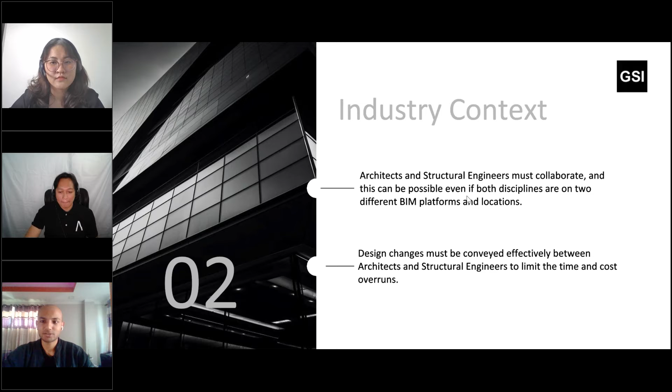Yeah, I totally agree. So moving on to the next slide, this is what we just talked about. The closed BIM approach restricts the ability of stakeholders to seamlessly exchange information, right? And it's quite nice if we can use Open BIM to break that siloed workflow or fragmented communication.

So let's start. In this webinar, we have these contents that we will be covering. First, we already finished the background info, so we will start with the general workflow. Next slide.

Before you continue, I'll just add that we're showing you only Archicad and Allplan, but that doesn't mean you should focus on just these two softwares. There are a lot of softwares you can use. We're just showing that you can collaborate with any software as long as it can provide the information, so you have a better workflow for your project. Just to be clear on the software you're going to use, we can show you a smooth process using Graphisoft and Allplan.

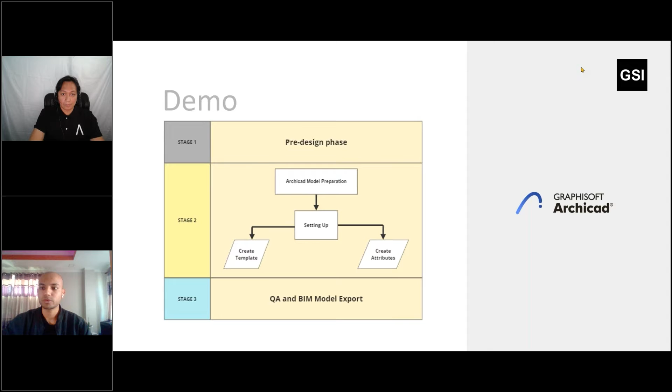I hope my screen is visible now. So this is the Archicad interface we have. This is the sample model here.

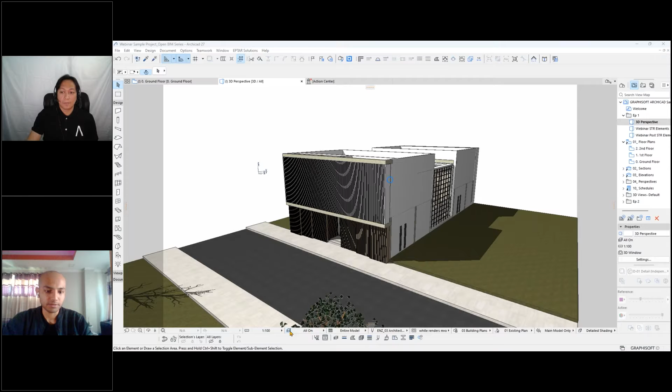Stage 1 is the pre-design phase, where the architects design the building, which might look something like this. For this project, we have this sample, and we will sort out this model so we can provide it to the structural team. Once the collaboration starts, we can set up the layer combinations, separating the layers as per the need and requirements.

Even before stage 1, the design team is supposed to have the templates created, the attributes maintained, and everything set up before starting the project. In this sample, we already have those done.

So on stage 2, basically this happens - the setting of templates, the creation of attributes, and all those things. But on stage 3, we move on to QA and BIM model export, which I'd like to show you here quickly.

On the QA side, we use a lot of layer combinations that we require to check for any discrepancies before exporting them to other design teams.

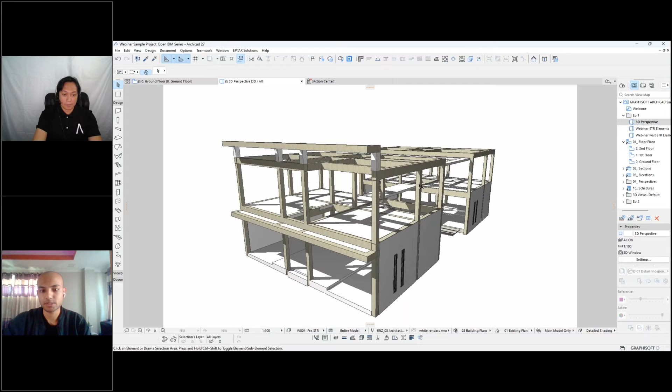First, I can just quickly switch to the structural model, which is an imagined concept made by the team for the structural layout.

We can also check the whole model according to the layers, if the layers are kept in the right model - I mean in the right layer, basically.

Also, highlighting the structural elements is necessary so that all those structural elements are on the proper layer, and once the other team receives the BIM model, they also have those same layers.

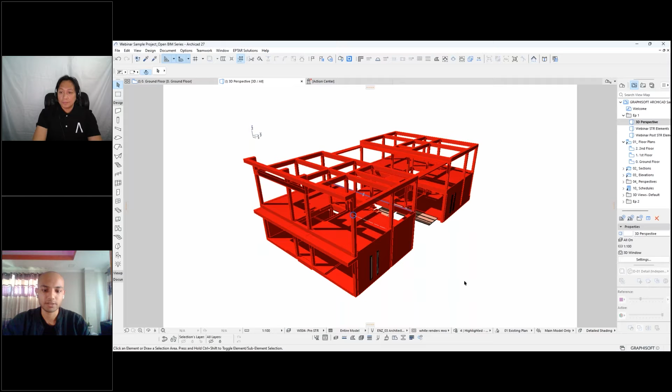Currently, I'm switching to no overrides, and this is the pre-design phase where we have not exported the model, so the layer combinations are set up in a way that displays the pre-design stage currently.

So this is where I export the model for the structural team to visualize the whole design concept, and they will get to adjust the structural elements, analyze the design accordingly, put in the load combinations, and rebar placements as well.

So quickly showing you how to export. Currently, I can just do the save as function here in Archicad. If I do that, it will give me a dialog box.

I hope you can see the dialog box. Is it visible? Yeah, it's visible. So currently it's saying to export the visible elements on all stories, and there's an option called entire project.

So depending on the phase or data exchange process, you can choose between these. If it's the first time you're sharing the model with the other design team, you might want to do the entire project. If it's in between the design phase, you can also do just the visible elements as per the requirements.

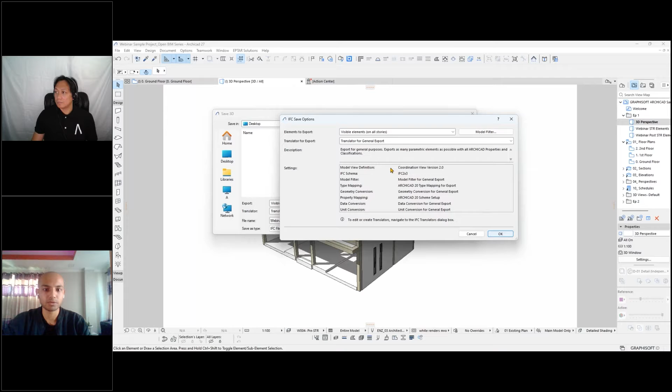Currently for this webinar, we have already set those up, but Archicad gives you the possibility to alter these settings. So for this, we will be going on with the general export. Once that's done, we just hit save so that the elements get saved.

So the model has been exported. I will send this to the structural team. For now, we have Jayson here with us, who will be taking that file in and try to seamlessly integrate that in another software, which will showcase our Open BIM concept for this webinar.

So that's about it from my side for now. I'll be back soon. Jayson, feel free to take the floor. Okay, thank you, Sudhir.

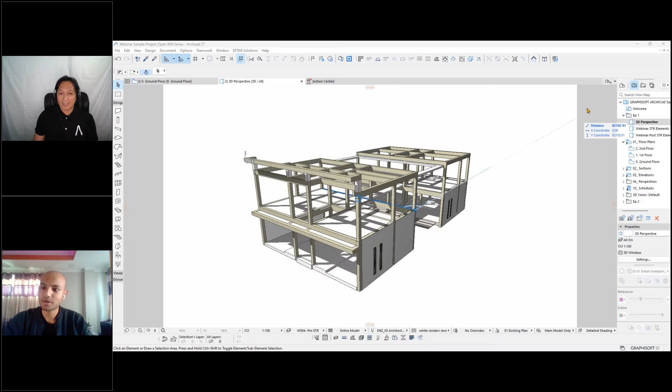I guess from your export, you also do some exporting of, let's say, attributes, right? Sudhir, I think you're muted. Yes, about that part, I would like to mention that as well. Thank you for reminding me.

No problem. So basically, with this model, we also want to share an attribute that has been custom made. In a project, the design team might want to have those properties custom made and sent out to another design team to fill it up or cross check. So for this one, we have a custom attribute created for this slab right here.

Yeah, so back to the Graphisoft interface. The custom attribute will be located here for the slab, on the classification and properties panel. We have a lot of properties here, but we will be mainly focusing on the floorings, where we have this custom attribute called webinar attribute 001 and 002. Number one is going to be a true or false statement; it can be a custom one. Number 2 will be a description that anybody can add, like a sample description here.

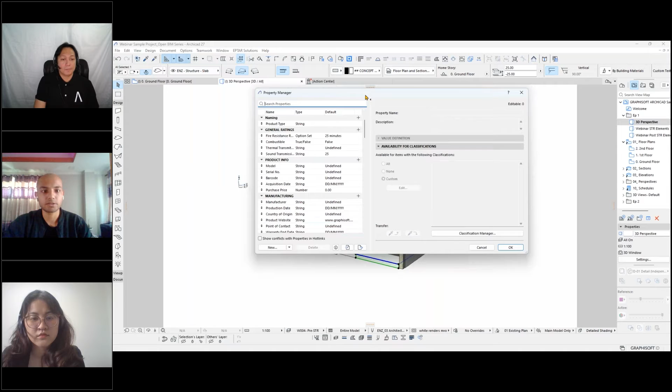This is possible here in Archicad by using the property manager palette. These are the settings where we can customize, create new properties or groupings, and assign them to the classification. We have classified this slab as a slab element, and then we have added the property to the slab as webinar 1 and webinar 2. Just demonstrating as a sample, I hit the name, and once that's done, it will be added to the naming group.

It will be added here as a string, but we have the option to choose from numbers, integers, or geometrical variables such as lengths, areas, volumes, or angle. You can also have tag lists and option sets created for it, true or false. What's even more cool is you can have expression-based properties defined here in the expression editor panel. For this, we added it on the floorings, as you can see over here.

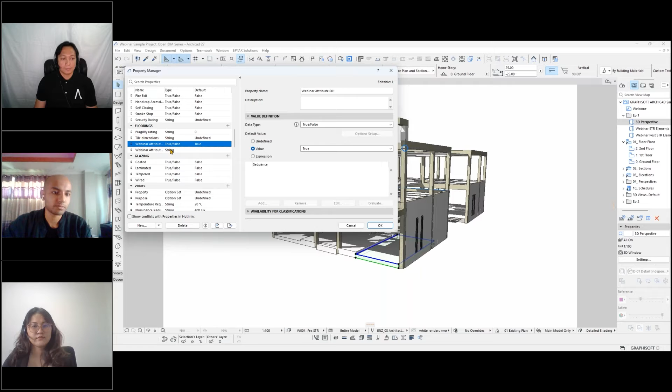This panel is where we can import and export properties as well. If you have a template already existing in your office or company, you can import the properties that are already there, or export what you created for future use. So for this webinar, we have it on the slab, and that's what I missed earlier. So Jayson, you can go ahead now.

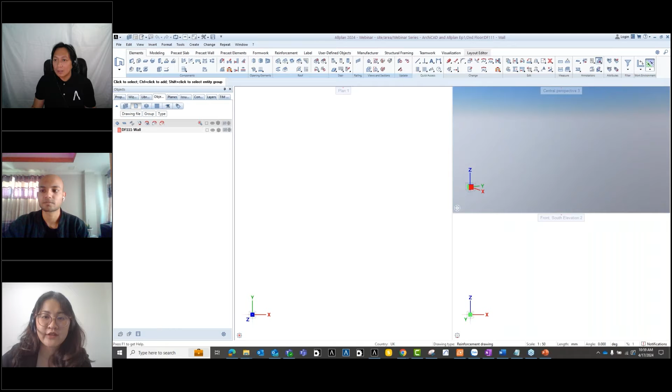Okay, thank you so much, Sudhir. Maybe I can take over. Thank you, Nu. I'm not sure which screen I'm showing. Can you let me know which screen I'm sharing now? We are seeing the software interface. Okay, great. Maybe I can just share first the monitor one. Let me shift my things here. Can you see my screen now? We can see the presentation slide, right? Yes, thank you.

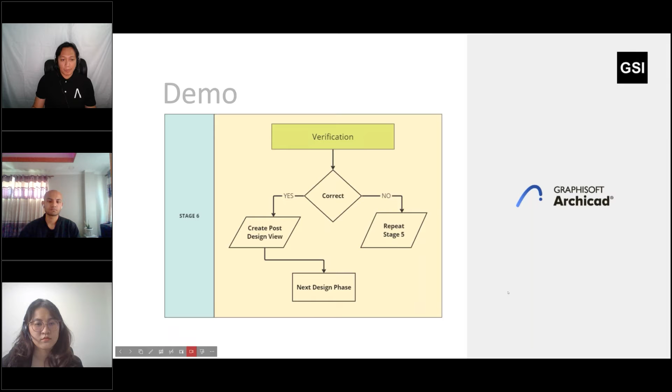Okay, so next slide. So this will be the next slide later on. Okay, so I will be showing back now my main screen, which is monitor 2. Now, can you see my software now? Open. Yes, okay, we can.

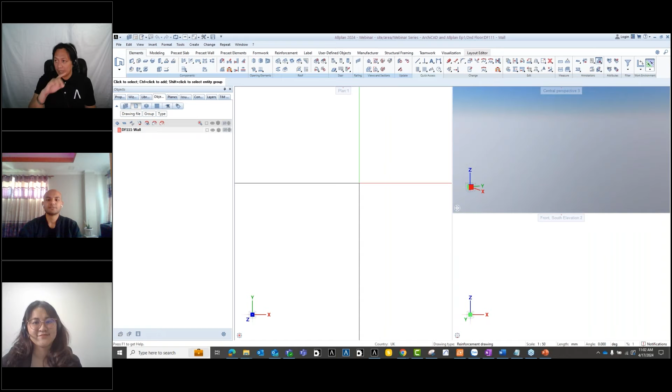So basically, this is the interface of Allplan. For those who don't know about Allplan or haven't seen Allplan, there are different industries here. That's why it's called an AEC software. There are different disciplines inside Allplan. You have architecture, engineering, bridge construction, and also precast. We also have road construction, and you can customize as well.

So basically, we'll just continue. I have the file now from Sudhir, which is this one. This is the one he exported. I will just import this using drag and drop, or I can use the import IFC data. Drag and drop is much easier. So I'll just drag and drop it. Then it will ask where I'm going to save it, so I'll just choose one.

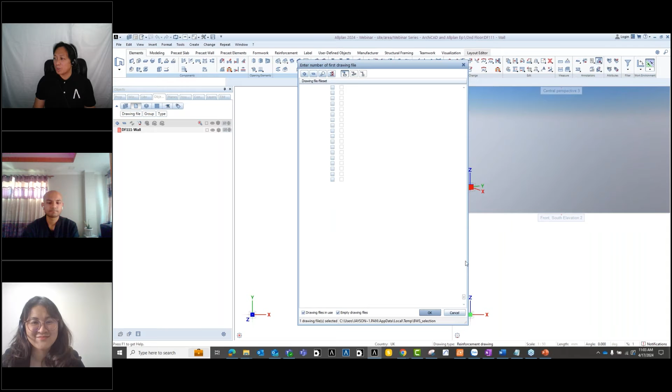I can go to open all drawing files. So we have actually 9,999 files where you can save it, so you can just choose from there. I'll just choose number 1 and then wait for a while to load it. Yeah. So now I have my model. This is the model that was shown earlier, right?

And since I will be the one in charge of the structural, there are some elements here that need to be changed. For example, for all the beams and columns, we have to change the sizes. This one is 250. If I measure it, it has to be at least 300, so it will be tied up with the beam.

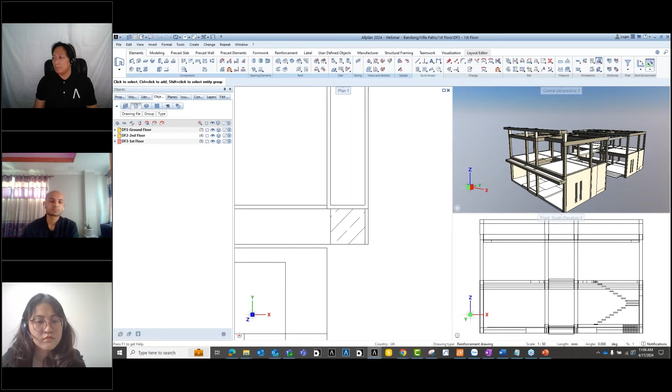But before that, since I'm working with Allplan, I can show you that we have this kind of building structure wherein we can organize our files, right? So what I did was, using the same model, I already have this separated. I have the ground floor, the first floor, and the second floor. So I'm going to work on these 3 levels.

And if I'm going to open these, I'll just say open. Yeah, just open this, and then select one, click on, and I can show you that I will have the same model. I just pre-modeled the beam, so maybe I can just remove this beam. Okay, so I have this model now, similar to what I had initially.

Moving forward, before I change the elements, I just want to highlight the slab. I guess this is the slab that Sudhir created. Just to show you, the attribute was captured. Let me check. Yep. There is an attribute wherein it's true or false in Archicad, but in my case it's just check or uncheck. It depends on the calculation or the integer that was placed before it was exported. So whatever you placed in Archicad as the attribute will also be captured in Allplan.

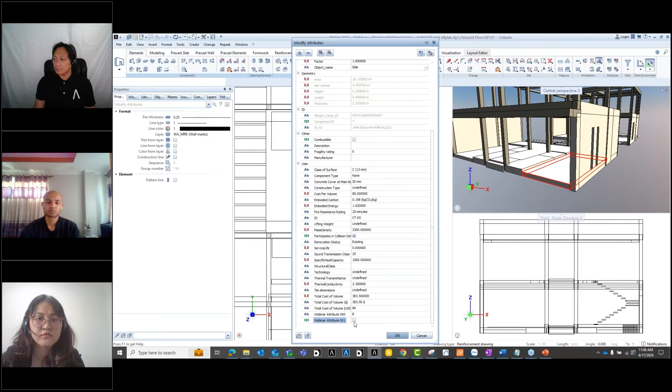Okay. So moving forward, as I mentioned before, I'm going to change the sizes of the columns. I will just separate the columns. I can do it this way, or I can open this whole thing and use my object palette here, which makes it easier. I can remove the visibility of all, and then open the eye of the column so that I can only see the columns.

What I can see from here is that the column size is 250 by 250. So I need to change all of them to a 300 size column. What I can use is this apply architecture component to this column, and I will change this to 300 by 300, and then say okay. And then I will just click all of these and say apply.

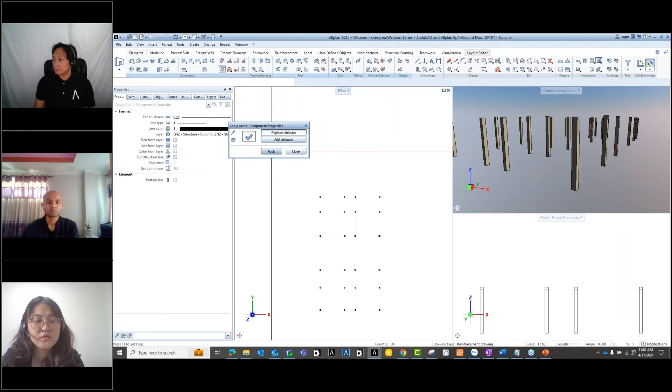So basically the rest will be shown, but you can just say go back to this object and just remove this and highlight this again. So if I'm going to check on the column now, all the columns should be 300 from this part. So that's how fast it is to change all in one.

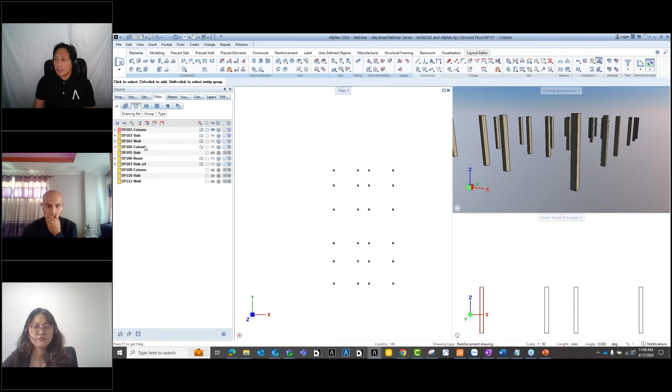Now, if I'm going to open my beam, so basically I have a beam on the second floor, which is this one. So basically my beams, as I think from the base design, should be 300 width. For now, it is only 250. Okay. So what I'm going to do is change, of course, the beams as what I have done with the column. So I will just use the same thing and then select the beam, and then I will just change the thickness of the beam to make it 300.

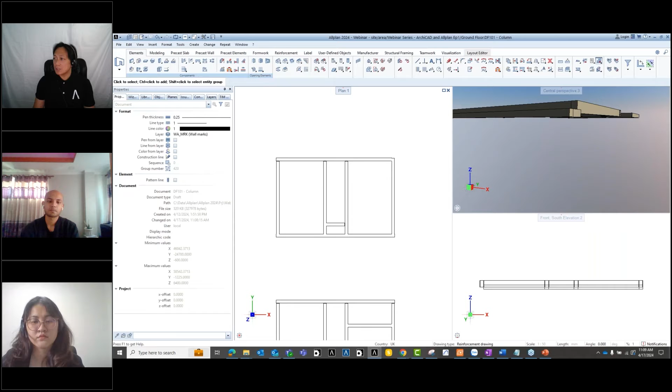So I can select which beam I'm going to change. Let's say like this one, or I can highlight as a window selection, and then I will say apply. And of course, let's see if it changed now. So now the width of the beam also changed in one time. So you don't have to click one by one and then change. So it's easier to do this way. Okay. So this is for the changes that I have made for the column and beam.

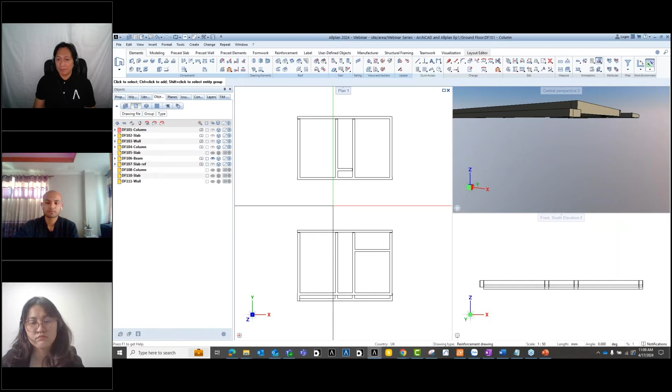So basically, moving forward with the other structure, like for the slab on the ground floor. So basically, I have this, make it visible. So I have this slab. So how fast is it to create a reinforcement, particular to different areas? So for the thickness here, you can see they're different. So maybe I can just focus, let's say, on one element here.

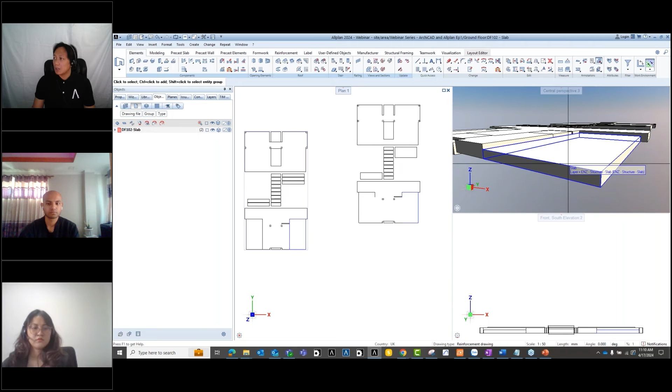What I can do is just create a view. So if I'm going to create a view, just say view, generate view, and then I can select, or I can select all, so it doesn't matter. So I will just select all. It's a plan view. So I'm just making a view so that when I put the reinforcement, it will be reflecting on this slab. So basically, if I place now reinforcement, where is it? Reinforcement, yeah. And then I will just use this enter area reinforcement.

And then I'm just going to do a window, and then say the concrete cover will be 25. As you can see, I have reinforcement here already. I can change the spacing. Let's say make it exaggerated a little bit to 200. And then I have some hooks on the end part. So you can modify the hooks of the bars. So basically, I just say okay. So if I'm going to show this in the isometric view, there should be some reinforcement shown already. So this one I will show it later.

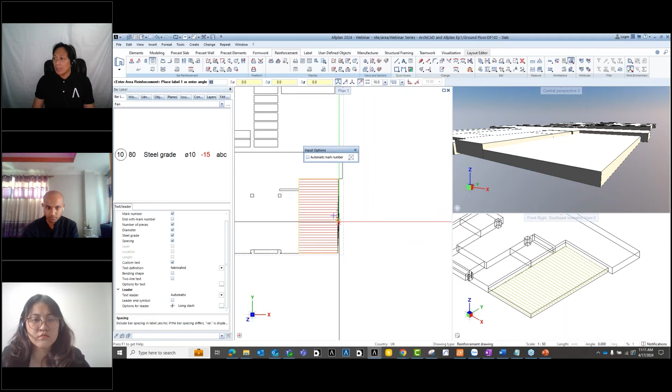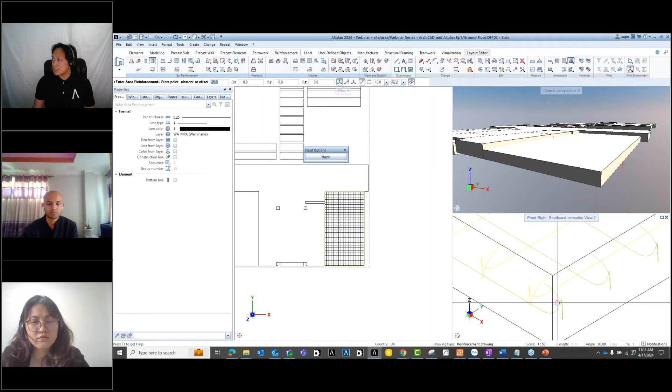So this is just one direction. But of course, I need another direction. So I can say just match, select the boundary, and then say I will just use 45 and then just say okay. And as you can see, it creates the crossbar of the reinforcement. So basically, if I'm going to zoom in here, you can see that the bars are shown here. So let me try to check.

Let's see the visibility of this slab. So slabs might be transparent. So basically this one. So the thickness might need to change, or the diameter might need to change. So basically, it shows this kind of reinforcement because the bar size was not properly changed. Maybe it's too big, so maybe I can just change it. Let's say right click, modify mark. Let's say about just 13 or 12.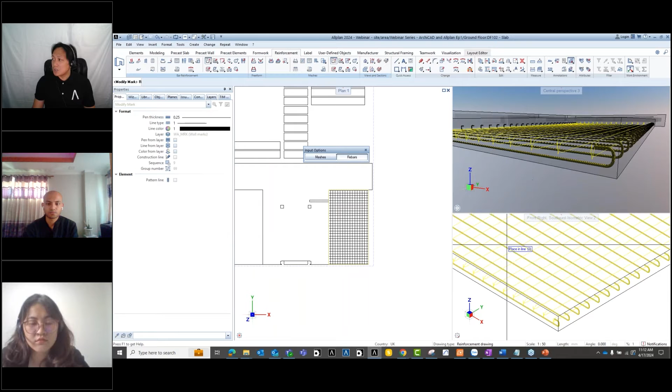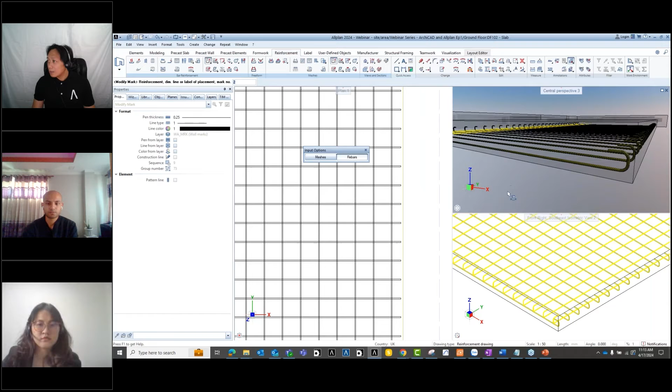Let's see. So as you can see, when I change the bar diameter, it shows already the correct shape of the bars. So what I changed is the horizontal, so I can change also the other bar to make this one, say, 10. Okay. Yeah. So just a, oh, okay. Let me try to refresh things. Yeah. It does not reflect properly here, but it can be seen here. So you can see from this part, it's hidden. Let me try to remove this. Okay. Yeah. So as you can see here, maybe it's just a graphic thing, but of course it can be shown here.

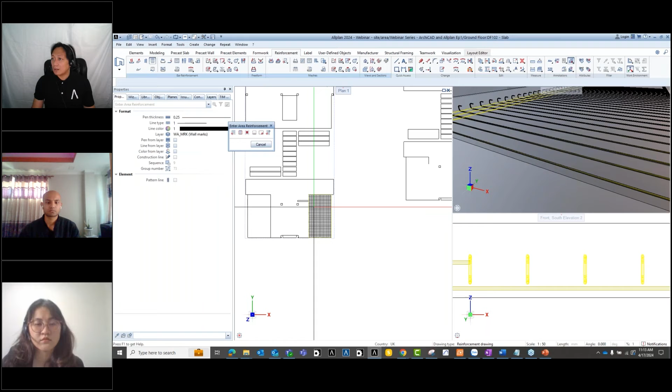So this is only on one layer, but of course we need to provide two layers, so I can place it again, select this area reinforcement and then match, and then click on the area. So I can just say from this part, let's say 45, and then change diameter to 13, so I think it's fine. Say okay, and then you can see now clearly where it is placed.

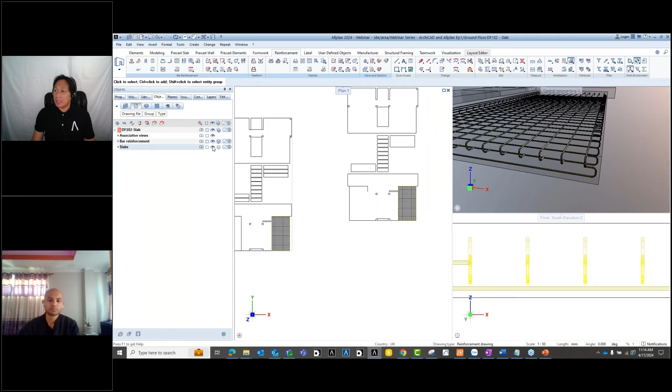Okay, so this is on top. I think I need to hide the slab again so that you can more easily see the reinforcements. So for this case you can adjust your spacing manually. Okay, so this is just to show you placing reinforcement on an in situ slab.

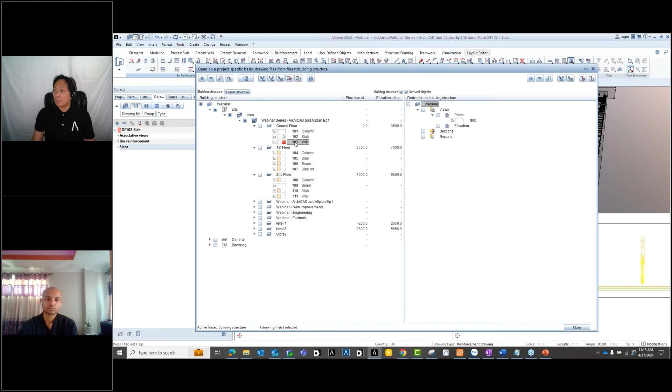Next, since I separated all the elements in different files, I can just move on. So if you're working in a group, then you can assign one person to do walls, one person to do columns. So this is how you can organize in Allplan. So now if I go to my wall, I have to open this. So basically, these are the walls, and then we're going to create them as precast.

So what I can do here is just select this tab and then say precast element, and then I can highlight everything here. So once there's a marking, it means they are already converted as a precast element, and it will automatically generate the typical walls if they are really typical. So it will be counted as one shop drawing or one element.

Okay. So since these are already precast elements, I can already generate the shop drawing. So I can just select this one, element plan. We call it in Allplan element plan. And then I can select this element and generate my shop drawing. And not only that, I can generate not only one, but two shop drawings.

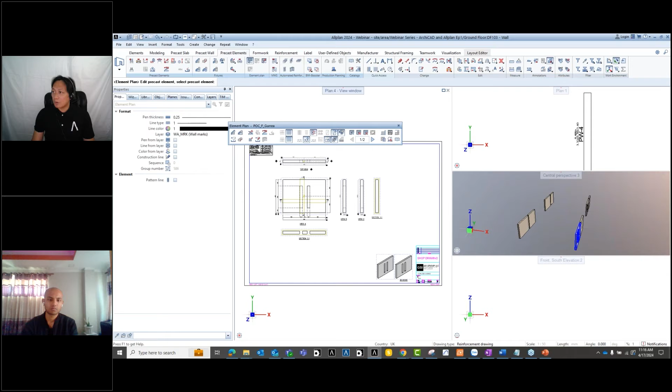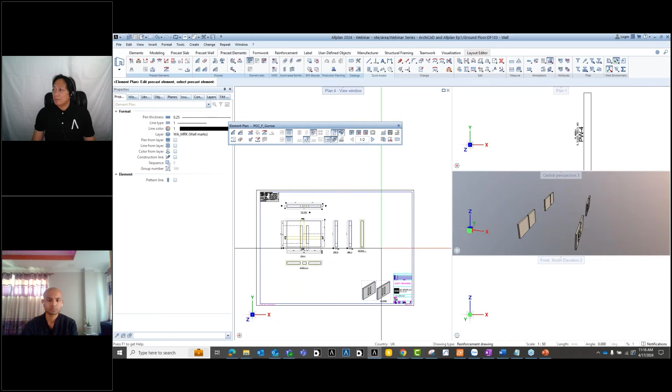So basically for this shop drawing, I have the reinforcement, and for the other one, I have my concrete body. So you don't have to create your drawings separately for what you want to show. If you have multiple drawings, it's also possible to generate not just one but more. Okay, so as I have shown you, there's a shop drawing and then there's a reinforcement. Of course, we need to provide reinforcement for this element.

So what I can do is say automated wall reinforcement, and then I can just select this element, and as you can see, I will have my reinforcement inside. Of course, in your shop drawing it still does not show, but if I create this, then your reinforcement will be shown.

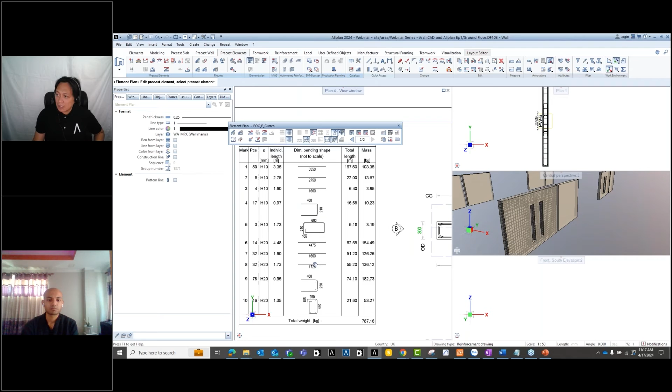Okay, so there will be a question: do you have the bar schedule of each element? Yes, we have this bar schedule. So what I have to do here is just refresh the drawing and say okay. Then I will have the list of all the bars that I have used on this particular wall, because this one is precast, so it will be an individual element.

Okay, so once this was converted to precast, of course, you can modify the element according to precast standards. Let's say, for example, I have to put some connection for the column to the wall. So basically, I need to provide some recess here, so I can create some cutouts. For example, I need to cut something here. So maybe I could just make it like this one, and then from where to where, so I can cut it.

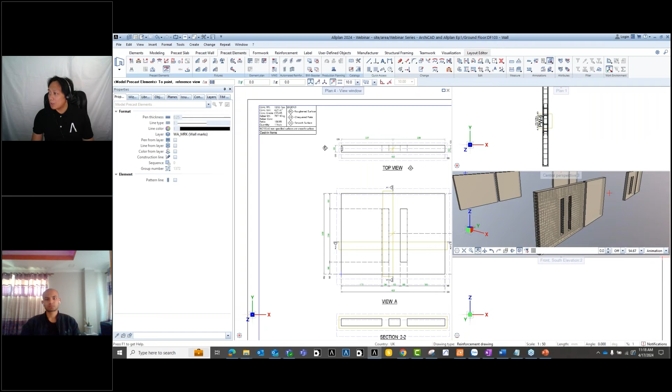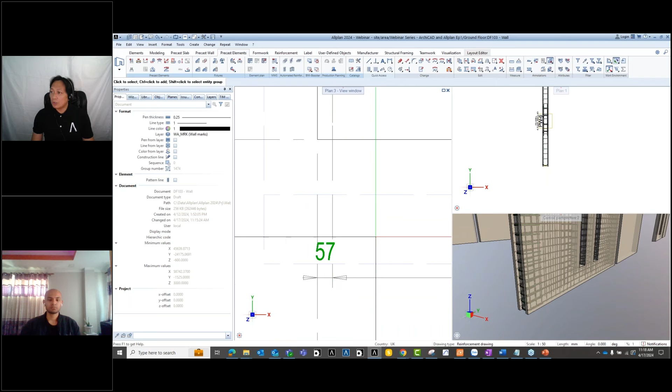So maybe I can zoom in here, just for you to see that even though I'm working with the 2D shop drawing, it already reflects on your 3D. So basically, it reflects here, right? And it also reflects on your drawing. So basically, you don't need to dimension, because it automatically dimensions whatever you change on your drawing or your element.

So aside from that, on my table here, I have my custom items, so maybe I can provide some fixtures. So let's say I want to have this kind of box, VS box, and then I will just place it, let's say here, and then rotation 90, so I can see it from below, and then I can place it somewhere at this height, say about 600.

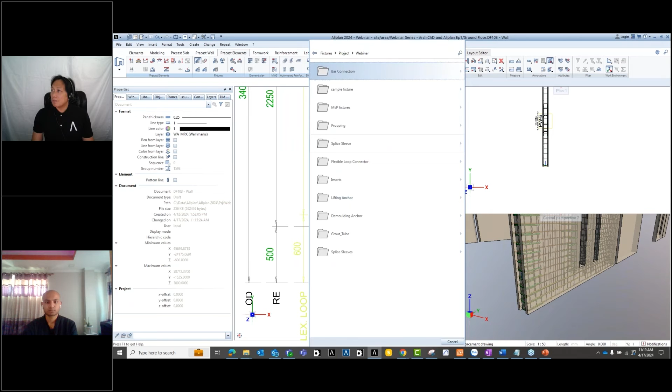Right? So that automatically gives you the dimension. So it shows also the text, what was placed. So if I'm going to close this, I have my fixture here, and as you can see from here, it also reflects. So of course, I can work with my fixtures at the 3D model. So I can select from here.

So what I can do here is I can copy. So this is the copy icon, and then select this fixture, and from here I will copy 3 times or 2 times with a spacing of 1000. Oops, maybe one part was, oh no, sorry, I missed it. I put it the wrong way, so maybe I just do an undo for a while. Okay.

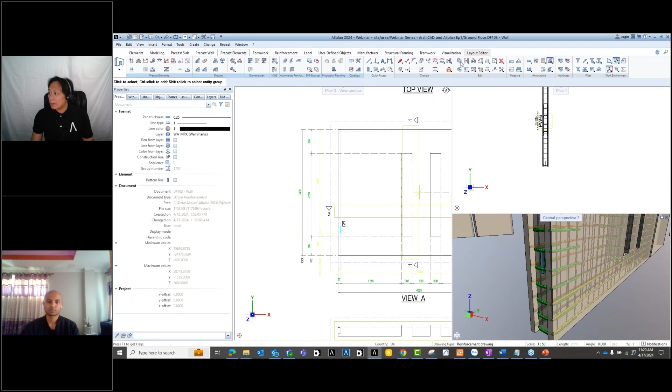Again, we can repeat that. Select the element that you want to copy. And then since I'm working on the global, that's why it's wrong. So we have to make this copy 2 times, but instead of in X axis, it should be on the Z axis, and then a space of 1000. Then I can have it all here. So I have this on my model as well as on my element plan or shop drawing. So it automatically dimensions your fixtures, and it shows here how many fixtures.

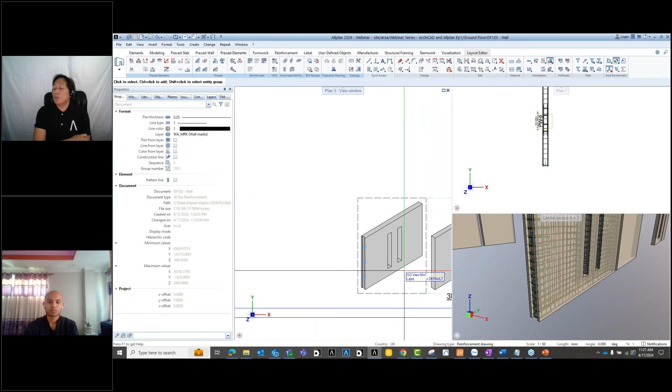Okay, so basically this will be for how you can model or how you can generate the precast element combined with your in situ. So it doesn't matter how many drawings you want to use, as long as you want to get the information, then you can provide more shop drawings here. And that's how easy you can place your reinforcement.

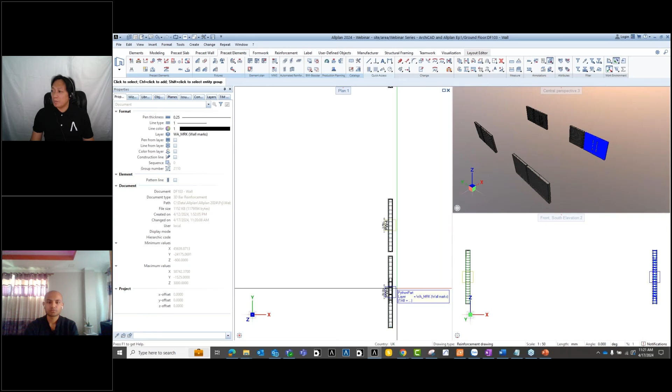And also, if you want, I can do selection also for the rest of the elements. And then I can just say create here. And then I can have all of them with reinforcements. So basically, that's the basic reinforcement on how we can place on the walls. So since you already have the shop drawing for this one, then you can export these drawings for your production. So it's easy just to show it to you.

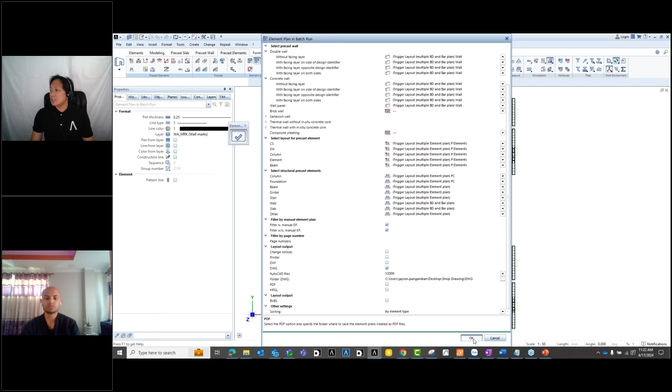You can export this using the batch run. So in the batch run, you have different types of, let's say, file that you can export. So you can just say what you want to export here. So yeah, and then say okay, and then you can just select the element. So basically I don't have to go into details because we're running out of time. So and then this one has to be passed to Sudhir.

So what I'm going to do now is that I just need to, let's say, create the attributes. So let me check if I have the attributes of my wall. Which one is this one? So let me check if I'm going to select this. Basically, I just do a modification. So I want to know if I have something here. So for this case, I will just add some attributes. Let's say this 2, because this normally asks this attribute. So it will have to, let's say, select this.

Okay, just for a while it's still loading. So I can just choose, let's say, this one. And then another one will be that 102. Yeah, I can just choose this one also. So I have these 2 attributes. So I think Sudhir can see this right later. So I will just say okay, and just to double check for the wall attribute, it was placed properly.

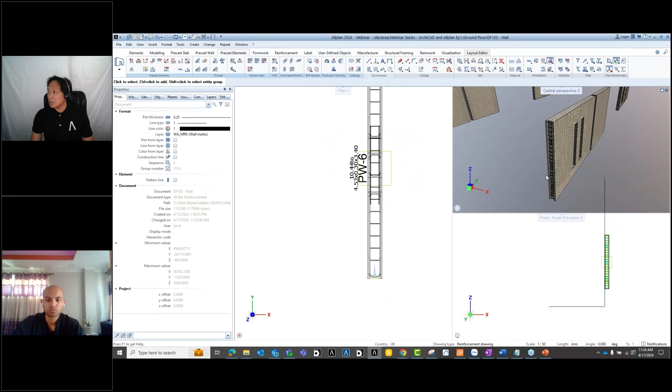Yeah, so it's here. So basically, you have 2 different elements here, the precast element and the architectural element. So I can also add this into precast element. So I can do an additional. So as you can see, they don't have it here. So I can also add the same. So code, I can add.

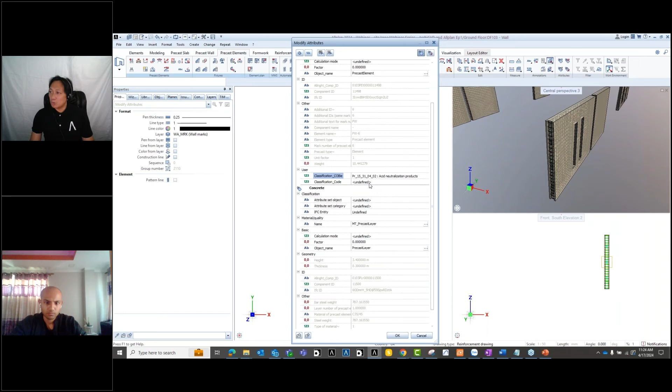Okay, just for a while loading for a bit because there's quite a lot of lists here. So just need to select which one. Okay, and then I say okay. And then I can do the rest for the attributes. So I can just add this as well to the others. But for now I will just add it on this element.

Okay, so basically that's my part for the structural. So I changed the column size, the beam size, and also changed the wall and these reinforcements in the slab. So maybe just a quick one on the second floor. Maybe I can say open this as my reference, and then I will just open the slab.

So this is just a quick one since I need to provide this part as precast elements, so I can just use the precast slab and then make it a half floor. So I will just put some slab here so that when I export this, Sudhir will have the same information. So I already have this part, I can have this part.

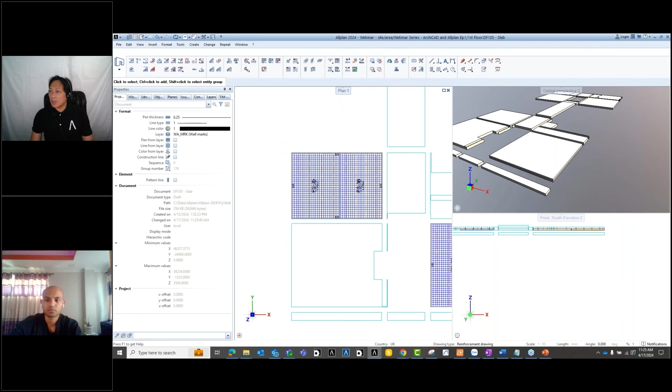Okay, so this is how fast you can create your precast slab. If I remove the object, you can see there's a slab, a precast slab shown here. So yeah, that's all for my side.

So what I'm going to do now is open the whole thing. I'll export whatever I have here as an IFC. Let me remove this so you don't have to. Okay, so this is the model now, and I'm going to export this, export, and then IFC.

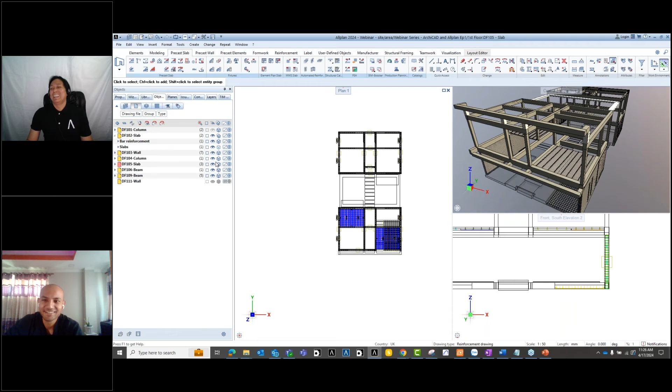Why isn't the columns showing up in the first floor? Oh, the columns, because it's still in invisible mode, so I have to open that first. Yeah, there it goes. Okay, so I think that should be for the model.

Then I will just export this model using export and then IFC. So from this one I can export. I'll pass this original file to you directly in Teams, so that you can import this as a live file.

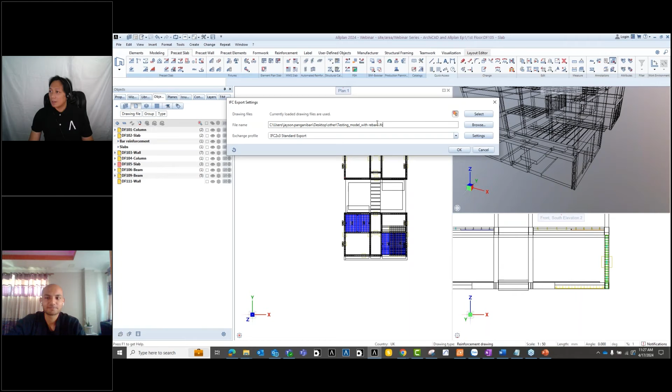Okay, just export. Sure, wait, so I will just export this. So just wait for a while to export, it's about 2 minutes. Oh, quite fast.

Interesting, now it's at 98%. So just wait for a while. I think we still have much time. We can exceed our time, right?

Sorry, I got too... No worries, yeah, much needed information, so that they have a clear view on what we're showing. So we just wait for this original file so that I can send it to you, so that they can see there's no hidden information here. Just for a while, still on that.

So how do you find it, Sudhir? What can you say about this process in Allplan and the attributes? I think it's quite nice that you can place those rebars quickly and design the precast elements as well. It's really nice to see that happening in front of me in like 15 to 20 minutes. You did that, it was quick.

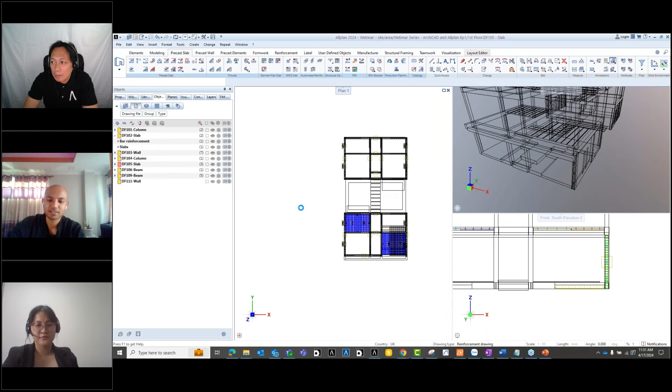So after this, I think Sudhir will be showing you what are the changes that will be reflecting in Archicad, right? We can sort of summarize as well, in the meantime, when we have those slides on.

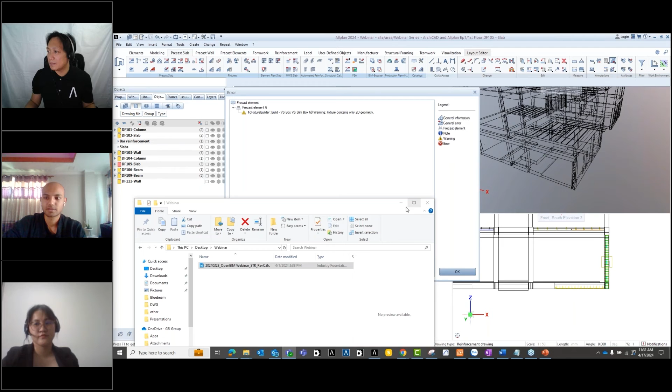Nice, I think it was already in, so I can send it to your teams, Sudhir. Okay, just sending. Here we go. Already sent to you. So maybe, yeah, okay, so I already sent it. Maybe you can check on this. Yeah, so I think you can transfer it to Sudhir. Thank you.

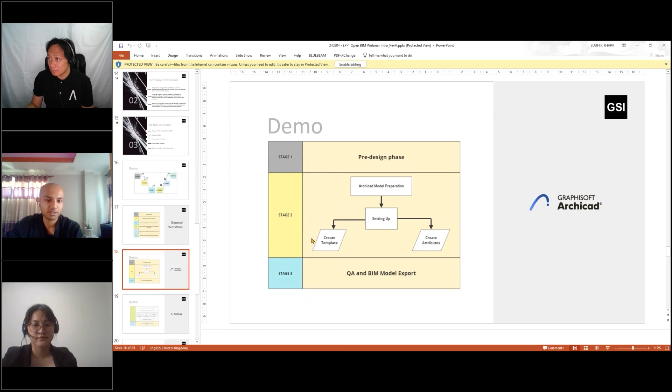Okay, so just to quickly summarize what happened earlier: we went from stage 1 to 3 quickly on Archicad. We had the sample model, and then on stage 2 we talked about setting up the attributes, the layer combinations, and the graphic overrides for the QAs, and things like that. After that, on Allplan, Jayson did the demo for you all.

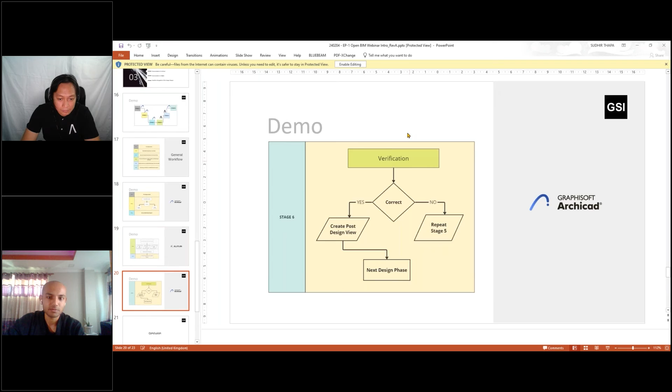Now we will be focusing on the slide, the verification on stage 6. After the verification, if it's correct, we will be creating the post design view for further working on the design. And if it's not correct, or the model is not yet finalized or has some issues, it will go back to stage 5 to the structural team.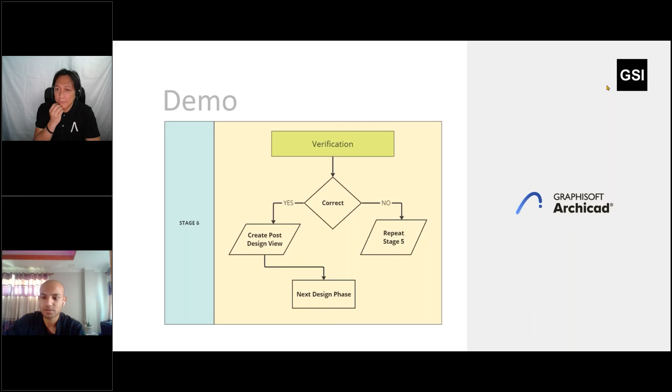So quickly starting on the Archicad side for demonstrating stage 6. This is the pre-designed view. Even the whole model, let's say here, all on. This was what got sent to all the teams, and also the structural team earlier got the whole design.

In Allplan, not exactly — you did not see the whole architectural elements, and that was on purpose. We sort of wanted to focus on the structural elements. So let's say it was in between the design phase, we exchanged the files, and that's why we only had the structural elements, which looked like this.

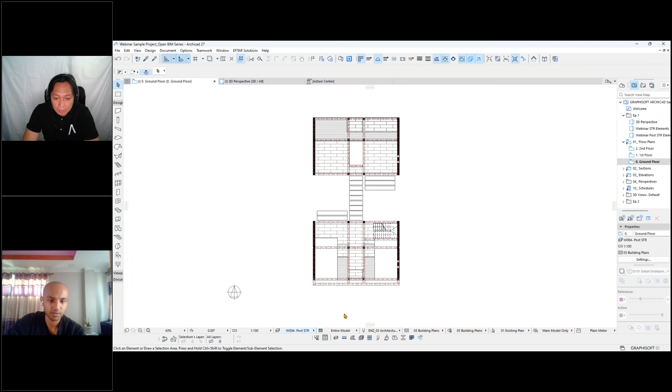Now if I go to my ground floor and turn the same layers on for the post — because now that pre-design is completed, we have the structural elements coming back from Allplan — it will be the post-design phase for now, so to speak. On the post-design layer combinations, we don't have anything yet, so we need to import. I will sort of import it.

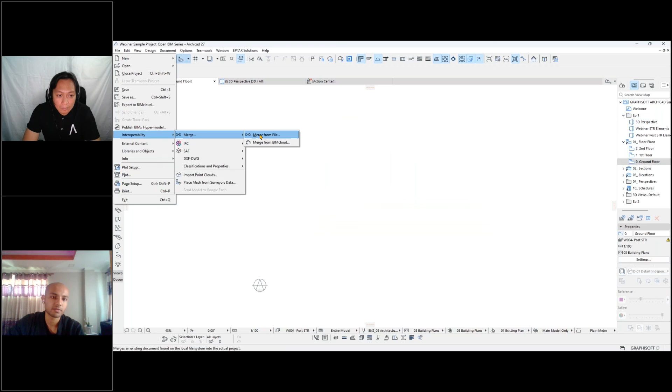So we can go to file and merge. Basically, on the interoperability option, we have the merge function here, where we can merge the file that comes in from any other BIM software.

So generally for importing, we'll be using the translator as general import. We'll open that, and it'll ask whether I want to embed the library or store it in an external location. We have these options, but for now I'll embed it in the same file.

Once I hit OK, there's a building selection dialog asking what I want to import. On the file, we have the file name as webinar series, sent out from the structural team — Jayson has sent me this one, and I will import that.

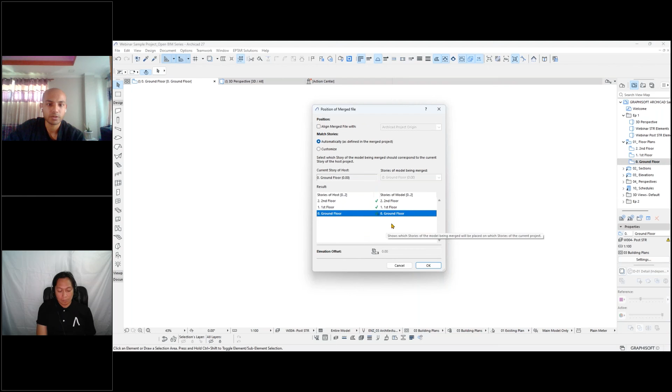But there are other options where we can align the merged file with several other kinds of origins, like survey points or just the Archicad project origin. It just depends on the project requirements and how we import and export. For this, we have the stories automatically aligned here, so it's quite simple — we just hit OK and continue.

So there we have it — we have the post design structural elements that just got exported from Allplan. Now, as you can see, the layer combination has turned to custom. We just need to feed the correct layers to the combination I've created as post structure. W004 post structure is the layer for the post design phase, the elements exported from Allplan.

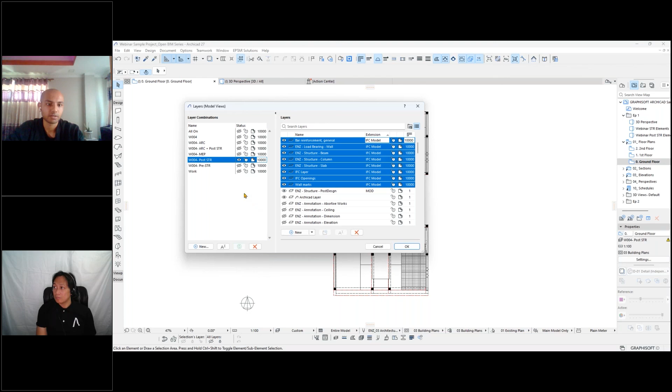Currently I can see these are the layers that came in. It shows up in the extension as well — you can sort these out by clicking on the extension, and all these IFCs are listed as shown here, so it's quick and easy to find. We can select all of those at the same time, turn that on, and update the post structural layer combination like that. Once it's updated, it will stay in that layer combination.

We can hit OK. So now our layer combination is correct, and this is the view on the ground floor plan. But if I quickly move on to the post structural elements view, the 3D view, which I've already saved here.

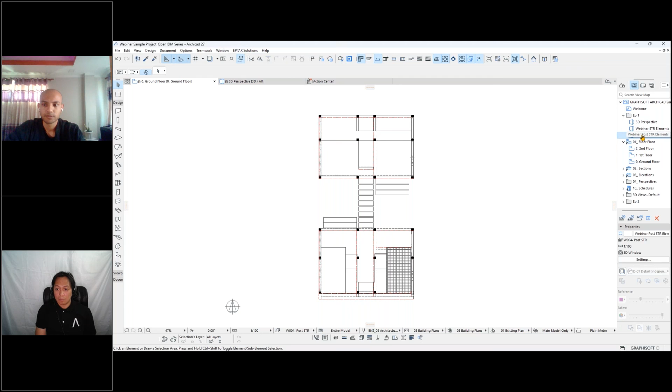So this is the view that we have now, which shows all those rebars that were placed, the precast elements that were done in Allplan.

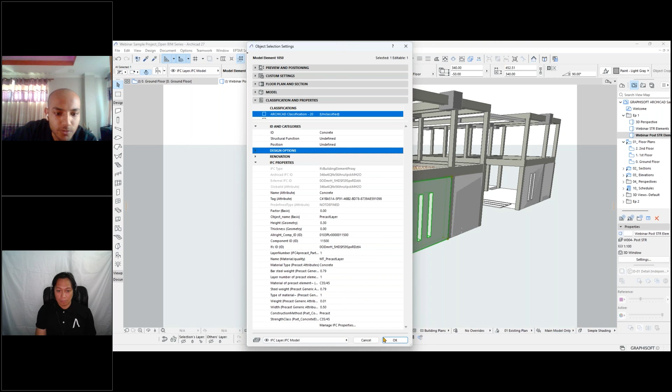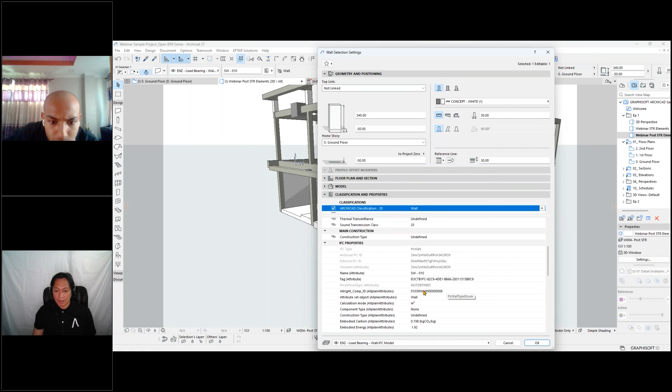And we can also quickly check out the attributes that were sent in this wall. If I remember, it's this wall where Jayson had placed it. Which wall was it again? I think it was this one. It's the first one, Sudhir. The front, okay, it's this one, right? It's this one, yeah. Okay, so it's supposed to show up here.

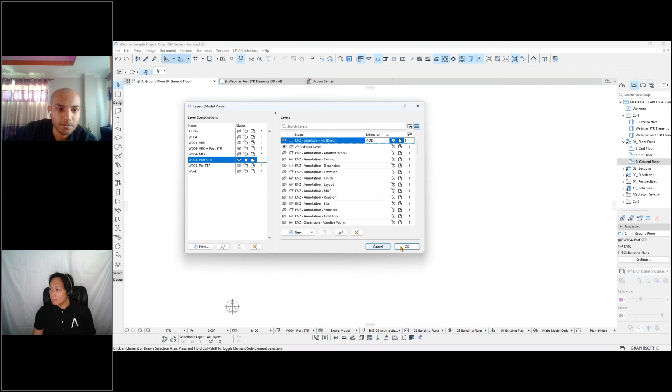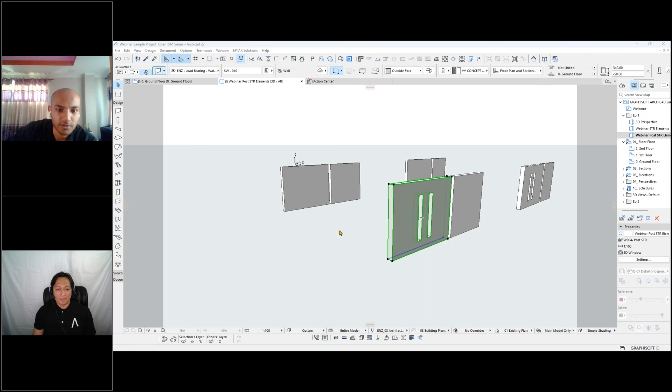But yeah, basically we can have that on this element here, just to quickly recap that. So quickly recapping that and importing, just checking out the walls only for the first one. The other one, so here's the other one. Oh yeah, this one. Yeah, okay, what's this one? There you go.

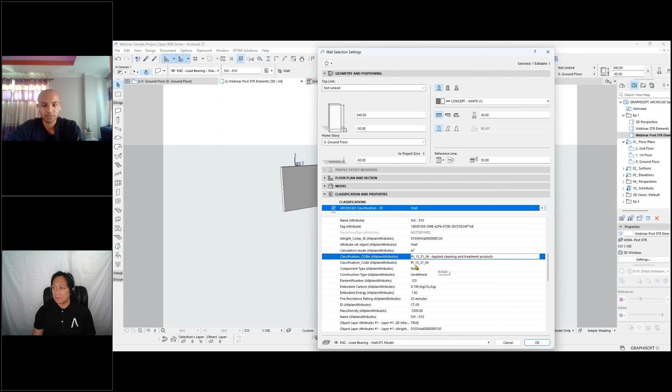Yeah, so the COBie file is right here. So what he mentioned on the IFC file, he embedded the property here. So the attributes come directly inside the Archicad interface as well, on the classification and properties panel, where now the designers can see that property and act accordingly for completing the design.

So just to add up, because this was normally asked by some of my friends or those persons looking for the attributes - always attributes - just to give you information that we can exchange attributes if it's really necessary to provide this. So we don't have to worry about the attributes.

Yes, absolutely. And once we have those structural elements coming back from the design team, all the remaining design teams can also be updated with the newly updated file from Archicad to other design disciplines who might be using various other softwares to design the MEP section, and even new changes that might occur in architecture design can be fed back to the structural team for further adjustments, right? So I think that's the conclusion on the webinar we have here today.

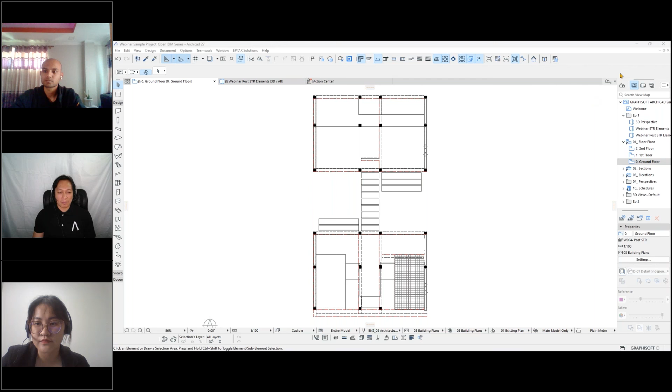So I guess while waiting for those questions to come out, maybe we can say something, Sudhir, for our next episode, episode 2, right? Yeah, for the next episode, as I said, about the MEP, because we do want to have that as well. Are you sharing screen, Sudhir? No, yeah, I'm sharing, one second, I will share my screen. One second. Oh, okay, yeah sure. No worries, continue. Yeah.

So the questions round will be continued. And for the next webinar, Jayson, we will continue with the design phase of the MEP elements. We will export those MEP elements from Archicad and see how that works out on your side, and get that back to Archicad, a similar workflow. So basically there will be additional information on how you can pass this information to Allplan again, and then we can modify your precast elements easily using this MEP.